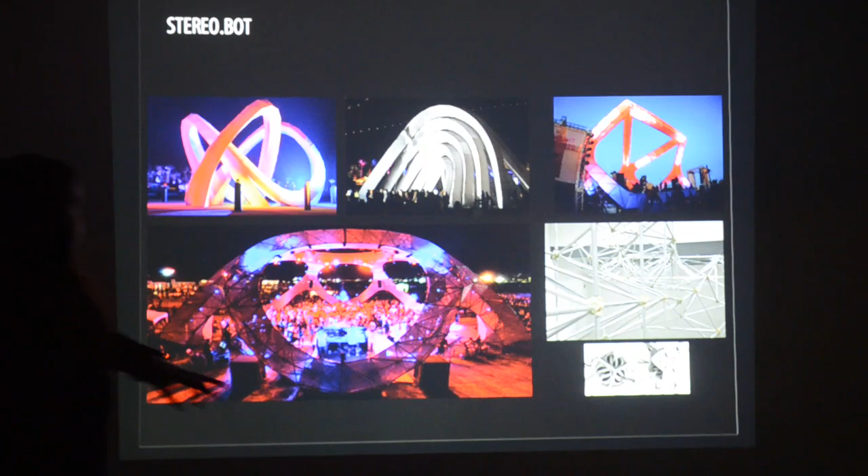I work for Stereo.Bot, a technology and programming company. One of the main things they developed is these node systems that make it very easy for them to create different forms from trusses. Usually you see trusses in vertical and horizontal ways, but now they're presented in curves, impossible curves, and projected with different projections.

So it's all about fabrication and different technology built. If you go to Coachella, these two are from Coachella, from the top. And if you ever attend the summer concerts at the Santa Monica Pier, the one on the corner is the permanent stage they built for the Santa Monica Pier.

I worked for Patrick Tighe Architecture, a local firm in the Santa Monica area. His work is mainly mixed-use and single housing, and he also does installations. One of the main things he works with is sustainable architecture, creating analysis and exploring new ideas and new ways of fabricating materials.

In a couple of the projects, the screen system they created for these buildings is a new, innovative way of fabricating things. And right now I'm working for VTBS, which is also a local office. Most of the work they do is in Los Angeles, mixed-use and big scale projects. So, busy.

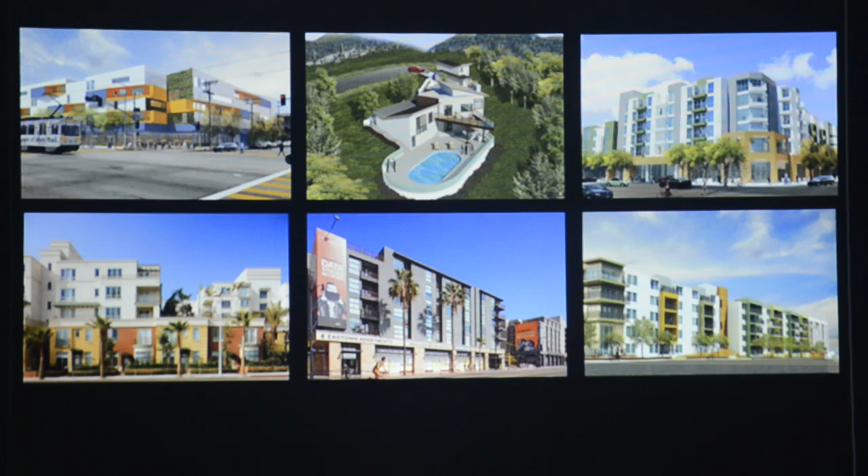Flipped is a little statement that I have. I'm going to read it for you.

Cities have patterns. The patterns represent infrastructure, circulation, public spaces, topography, everything including buildings. Typically, architects insert architecture into cities as if they were buildings only. They might refer to or service the city through apertures and site conditions such as plinth or footprints, but usually this comes from a sensitivity to the site and not a formal and generative relation to the many possible city patterns. This thesis seeks not a reading or a reference, but an aggressive use of a pattern as a formal device for creating a city.

A pattern in some ways, like a ubiquitous grid, is overlaid on an urban swath, but unlike the grid, this formal device generates dimensional urban conditions. The graphic of a pattern is intentionally both 2D and 3D. In this way, the horizontal plane of the pattern, as the exact streets and blocks, can be flipped, turned vertically to create streets between buildings and buildings nested into each other. Urban connectivity is achieved both through the complexity of the pattern and its unifying capabilities across the site. Through a new geometric topography of the pattern, unexpected spatial and sectional urban conditions emerge.

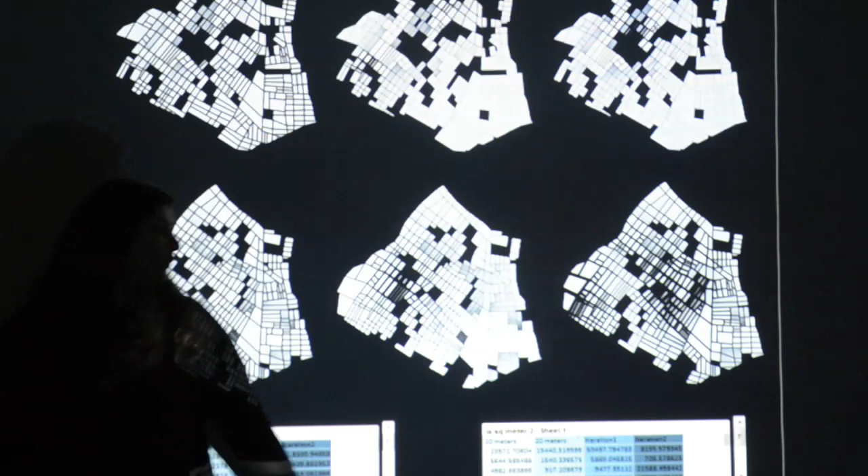So those are areas where you can't use a car, you have to walk. The next one is when I have two focus points. As you see, closer to the center the streets are wider, and further out they become smaller. The square footages also change if I change the street width. So this was a little play I did with the information I got, to see how I can experiment with this city, grid, and block system.

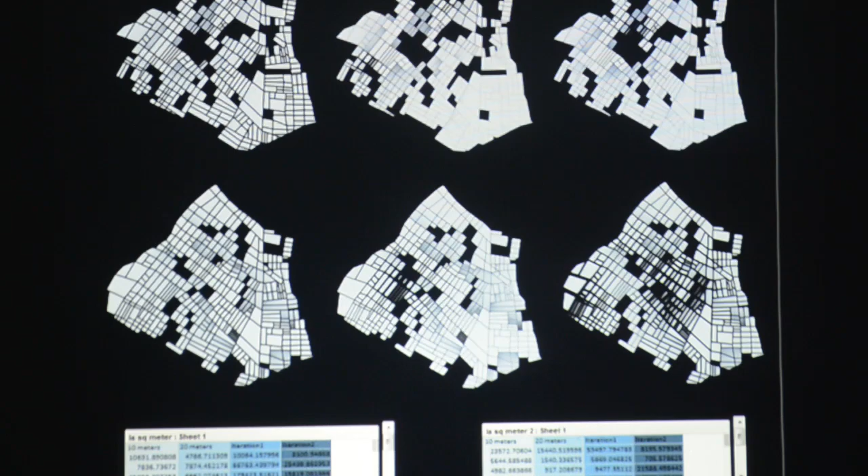The idea was, after I had all this data and information, what if I go back to the beginning and study the grid? What is the grid? For us, mainly the regular grid is the one where streets run at a 90-degree right angle and continue without interruption. The second one is the Manhattan grid, which most of us know, since Manhattan has this grid system and continues without interruption.

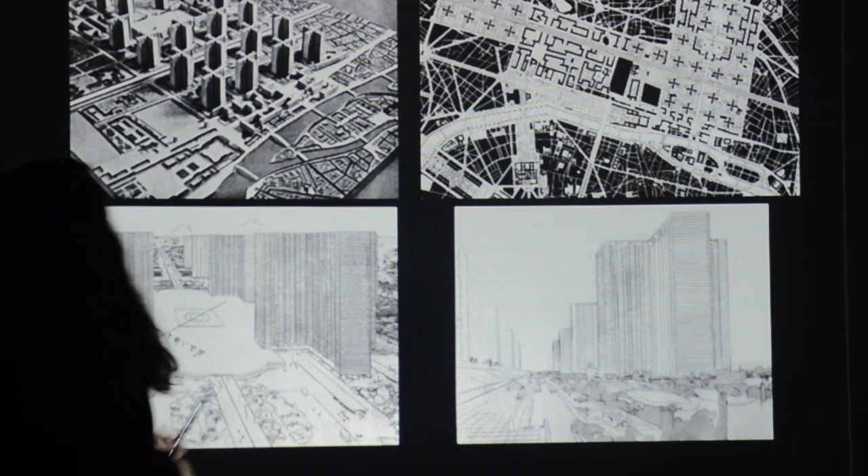In his idea, his utopia was to create these towers, and as it moves outward toward the towers, he created this block system, which you can see here and here, the residential blocks. People would move in, and he had this very specific way for them to live, a plan for them to eat a certain way or do their laundry a certain way. He had this whole thing laid out.

The problem I personally have with this one is that yes, it has differentiation between these two areas, but how are you going to expand it? This is a question I've been asking in all the precedent studies I've done for this project: how do you expand this grid without it eventually becoming a mess on the other side? How do you create a pattern that's able to expand and grow without an interruption in the middle that's completely different from the rest?

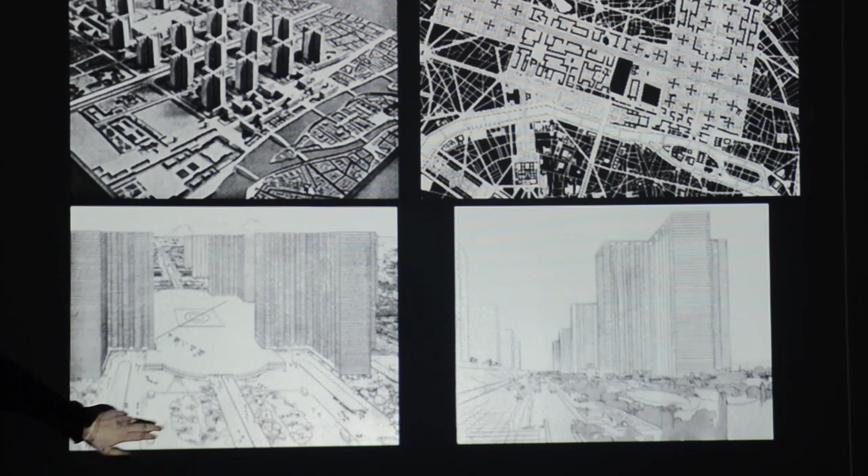These bottom images are perspective views that he created. What I love is how detailed he figured out the circulations, the buses, the streets, the different levels of interaction, and the fact that in this part, most of the streets are empty.

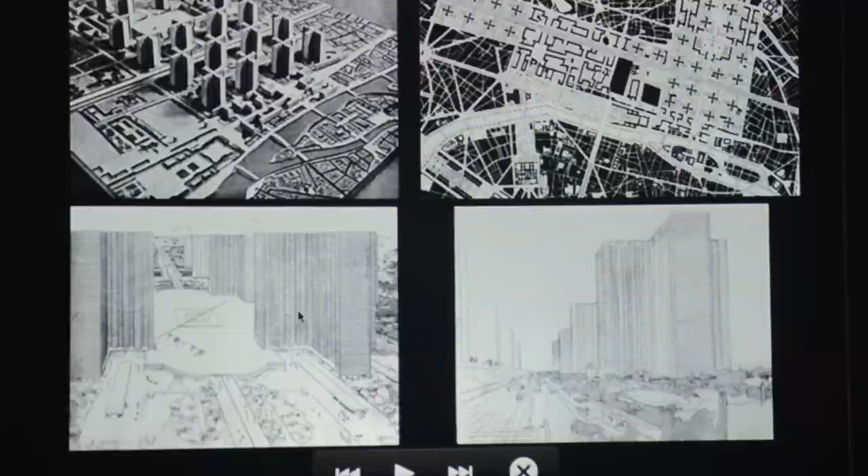The fourth project that I looked at was Parc de la Villette by OMA. For me, the reason I really liked this one, and it was very intriguing, was that back then I thought this study could be a building and not an urban plan.

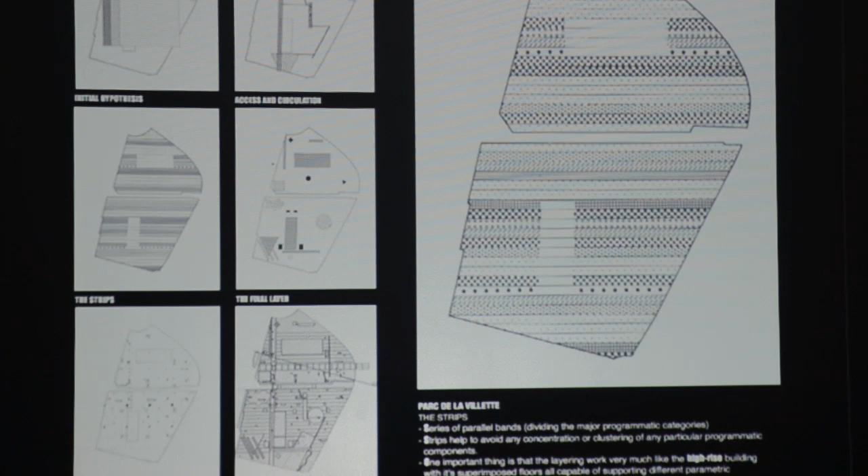But if you add a ground plane on this side, it looks like a high-rise. It looks like a section or an elevation of a building. It doesn't look like a plan. It can act as both.

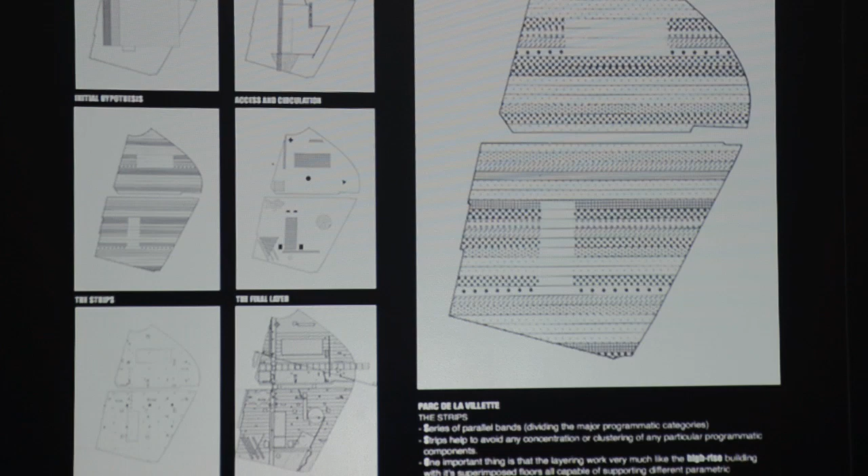The significance of this is a series of parallel bands that run through, separating the specific programs and categories, while avoiding any interruption or cluster within the programs. And the third thing is how it looks like an elevation with specific buildings or sections and specific programs within it.

After that, I said instead of studying the precedents, let's look for a specific pattern that can grow, because I was asking how this grid can grow over and over again. I started to look at patterns that can be continued forever, patterns you can add on and on and on and they would look the same, with no interruption in them.

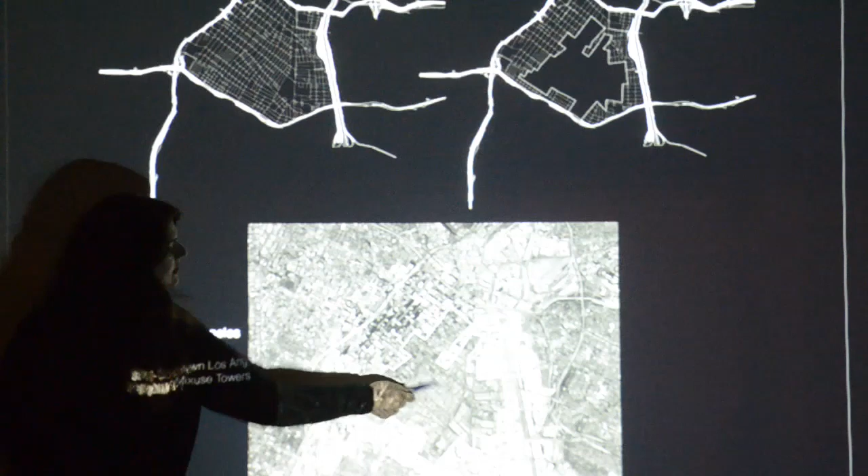The site for my project, I very much like the Mission Grand Axis. I chose this very specific site in downtown because most of the overlaps happen there, because this part is where all the big towers are, the financial districts, warehouses, commercial spaces, buildings. Most of the overlaps and chaos happens in that area.

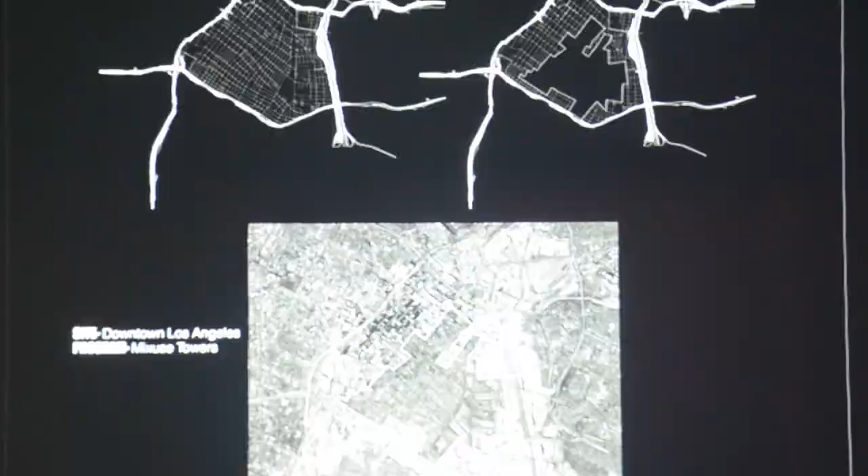So this is kind of a plan that I made. As you see, the area I'm choosing is this mess of a cluster. Fun fact, this is SCI-Arc.

What I did is I scraped out the buildings and applied my own pattern into it. I kept the blocks, I didn't get rid of them, just to see how it would interact with the new pattern that I put in.

Bigger scale. Just a reminder, just like the Nolli map, the figure ground: buildings are the black, open spaces and public spaces are the white.

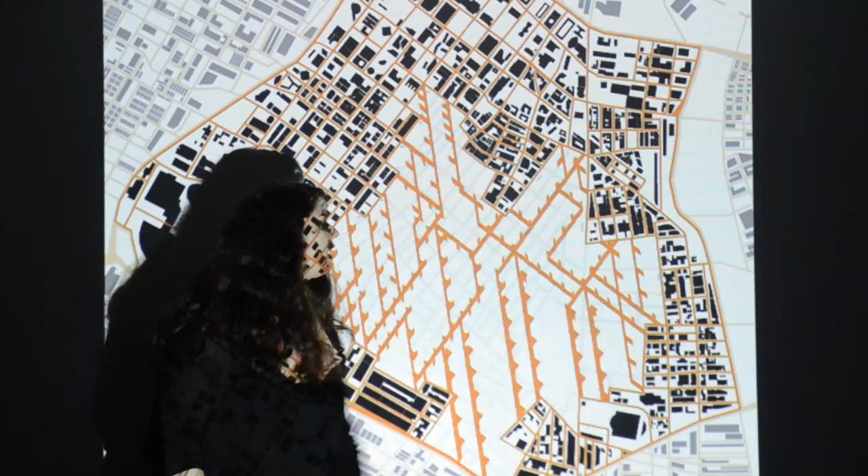One of the questions I got from the instructors was, what are these little notches that you have? I said it can be a little ramp or a parking slot for the buildings.

So this is just showing the streets - a dramatic change between the two. And this is an overlap of the new one with the old one.

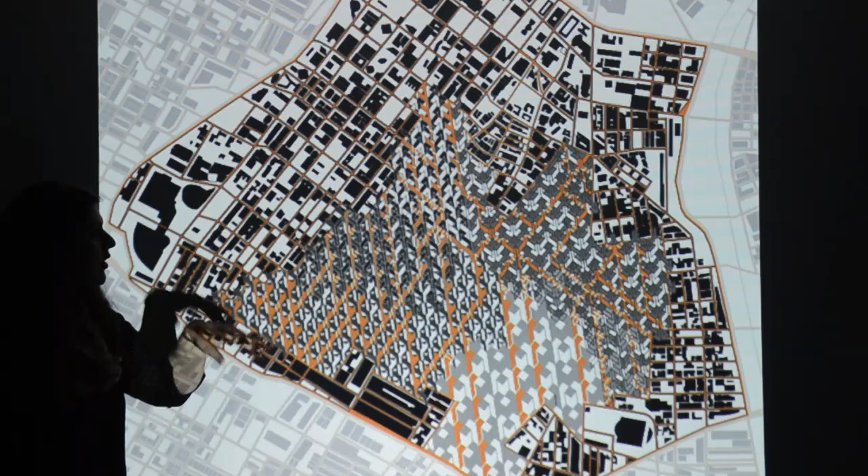Thom Mayne at the meeting asked me where the site specifically is, and I told him, well, this is the temple and this is this area. He asked, where would my building be? I said, oh, I'll show you, because he has a Caltrans building. The Caltrans building - I pointed to this area that was demolished and said, oh, this would have been there. He didn't seem very happy. He didn't like my project at the end. But yeah, just to show you where.

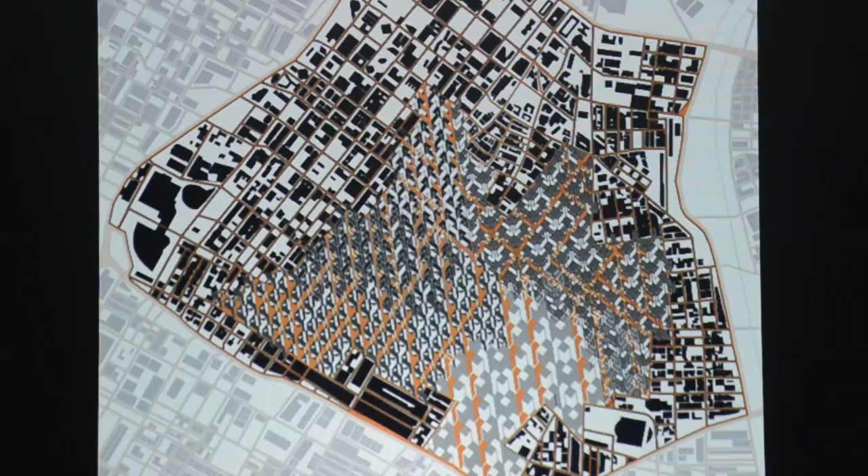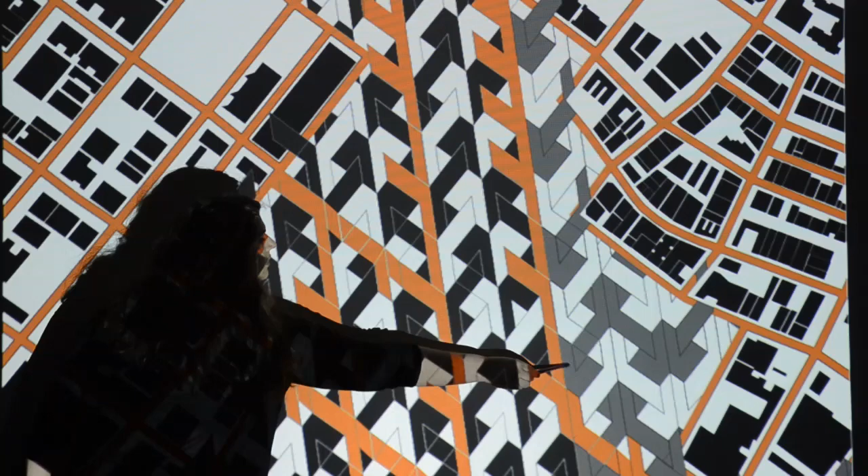These little areas you see in white, I'll show you up close - those are where the overlaps happened. So just to show how these areas started to merge within the existing grid, I'll show you a 3D view so you can see it better. In certain areas you have an underlap happening, and in certain areas you have an overlap. This is a different pattern, and this is a different pattern, but they merge perfectly - there's no interruption within the two.

This is where all 4 patterns come together, and the different grays represent different functions - warehouses, commercial buildings, residential. I have 2 different residential-commercial buildings. Those were supposed to be mixed-use building spaces because they weave into one another.

This is another close-up, again 2 different patterns overlapping to one another. These whites are where the areas are overlapping.

I did shadow studies for these areas at different times of the day. This is a 1 p.m. shadow study. As you can see, some areas are darker - it's because I changed the height of these buildings, they're not all the same height. This is a close-up of the 1 p.m. study.

The 11 a.m. study shows a different pattern.

This is my overall installation that I had. Just to give you a scale, this is a 60-inch model. This is pretty big - this was a figure ground study. It's an acrylic model, laser cut in individual pieces and then interlocked to one another.

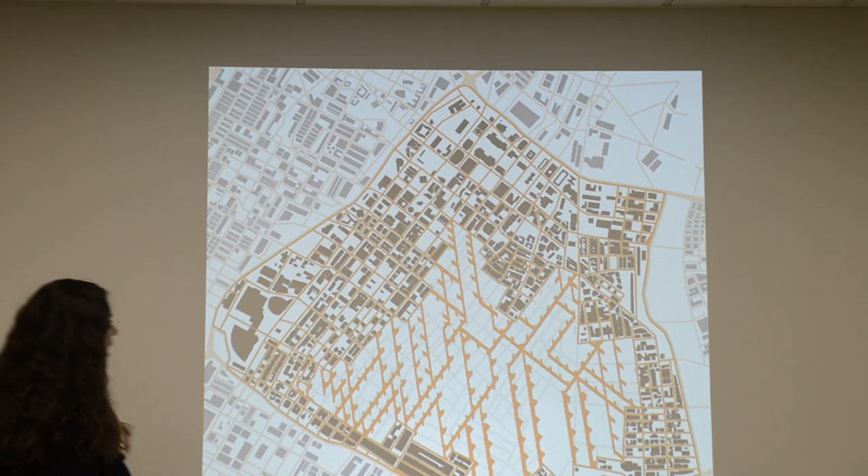What was the reason you proposed this in an existing city block, with all these challenges, rather than new development? Well, I was trying to tease them, like mine is better than yours, it clearly doesn't work for them. Mine has so much more space, so many opportunities, and yours don't do much. So it was my proposal to show what it looks like, because if I scraped everything off and didn't show the city grid, the look of my pattern wouldn't be so dramatic, you wouldn't see that big differential scale anymore. So I was trying to tease them, and also trying to impress Tommy. It backfired.

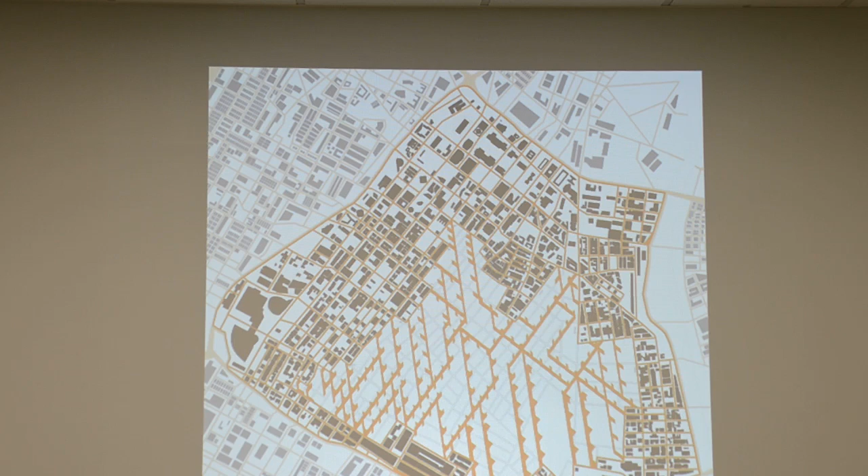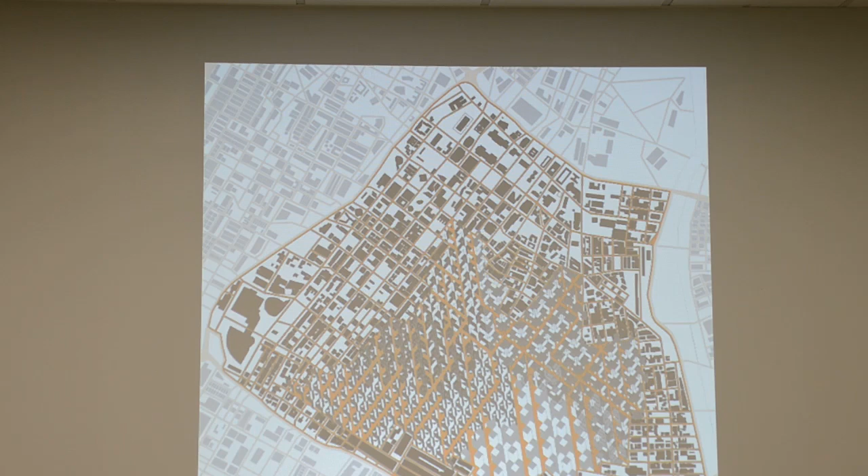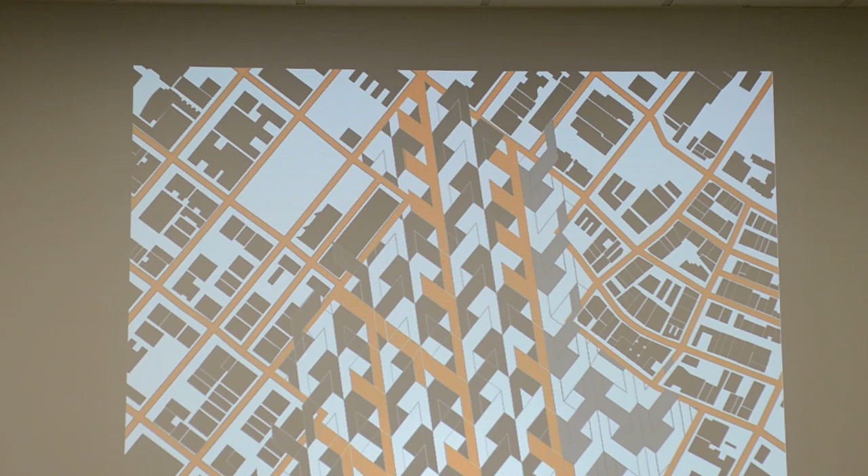This pattern system looks very drastically new and different from the existing, but you're using the same terminology for the city: commercial, residential, open space, government office. So what do you change in the city life as part of the pattern you're presenting, and why are these patterns only sharp angles? Do these motifs come from somewhere, or are you creating all these small motifs yourself?

I just played around with the original pattern. At the end, if you delete certain lines and colors, you'll come back to the houndstooth pattern, it's generated from the same base. As for what I'm trying to change in the life of a city, I'll be influencing traffic, overlaps of commercial and residential, overlaps of areas that have nothing to do with one another, since there's this very specific separation between those functions within the city.

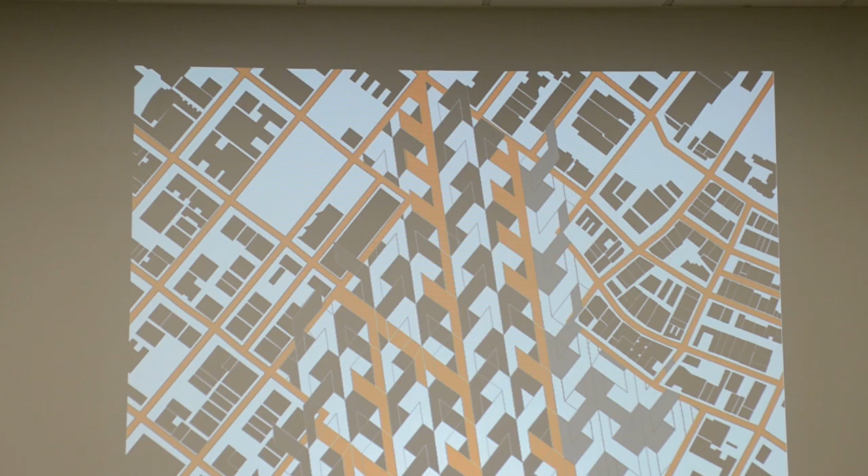So you kind of pinpoint a chaotic movement into certain areas, that's one of the things that will change in the city. Does that answer the question? Did I understand it right?

For your second question, she chose the sharp angles, but it could be all curved, all kinds of different patterns. For now, it was just this, otherwise it could go on forever.

All right, seems like we've got it all. That was an example. How much was that, John?